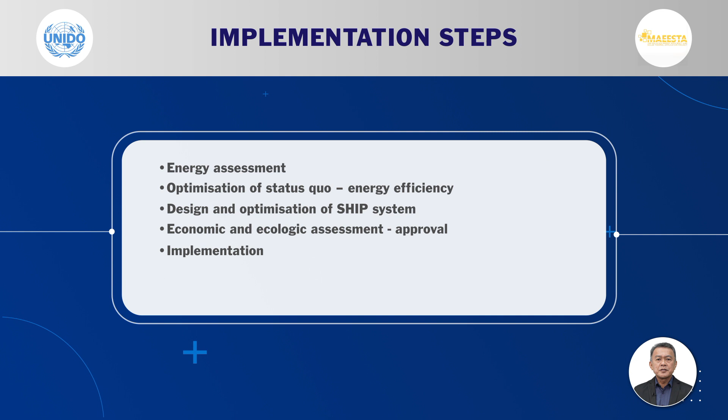The implementation of a well-designed system starts with an energy assessment. Energy assessment provides you with information on how to optimize the performance of your existing system, as well as identifying potential solar thermal integration points. The focus is to maximize energy efficiency first, prior to considering any solar thermal integration.

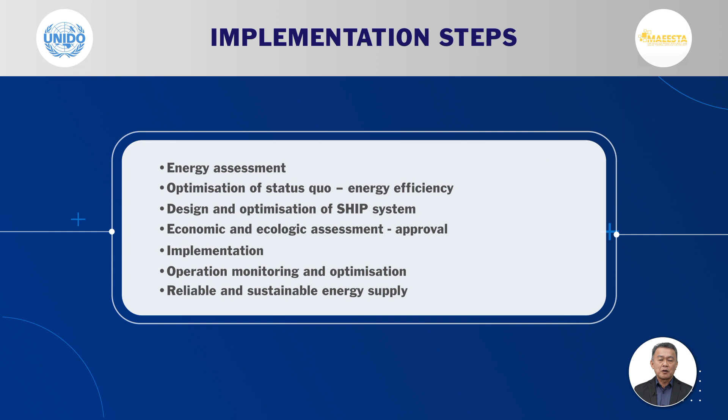Once the integration point is identified, you can then start to design your proposed system. The key information required are the required temperature and mass flow, operating hours per day, operating days per week, as well as typical off days in a year, together with availability of space for the solar collector and the storage tanks. A well-designed system will have good monitoring instrumentation in place.

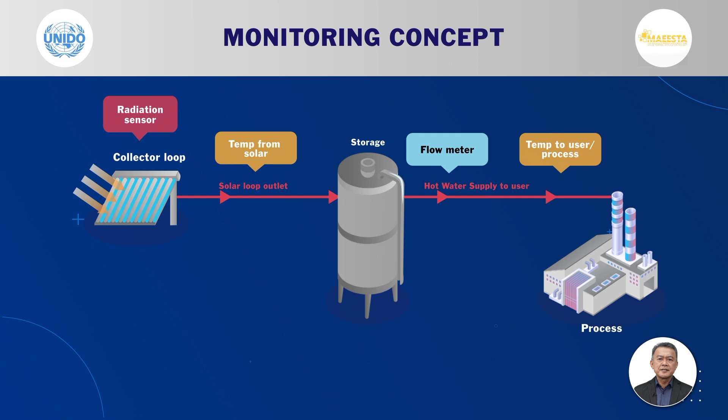Once the installation is completed, testing and commissioning is important to optimize the performance. Information from the monitoring system are key input to good testing and commissioning.

For solar thermal system, the basic monitoring concept would involve measuring the temperature and flow of the solar loop, temperature and flow of the process loop, as well as the temperature in the storage tank and the volume of top-up water. For large size tank, it may require more temperature sensors to have a good profile of the temperature of the hot water. Measurement of ambient conditions such as solar radiation, wind, temperature are useful but not critical.

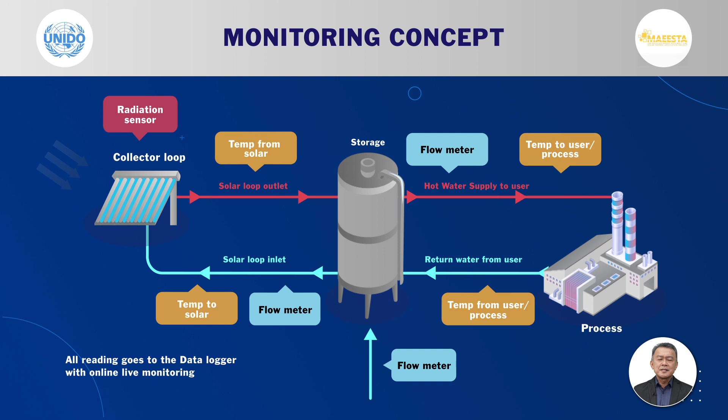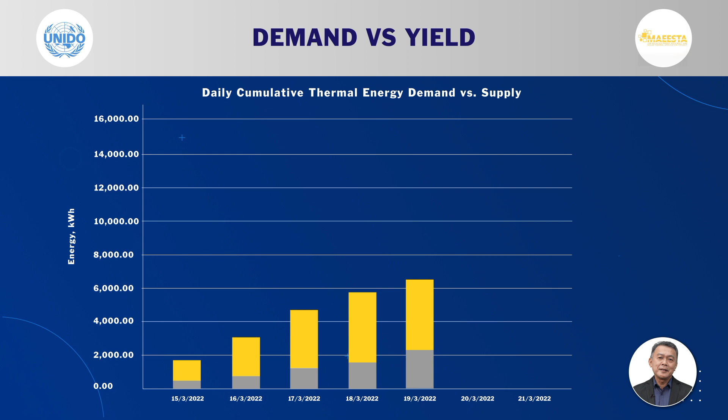The main objective of monitoring system is to have an insight into the system performance. The goal is to have as much heat delivered by the sun while keeping the auxiliary heatings to the minimum. Monitoring data allow you to visualize your system performance, comparing thermal demands against heat yield from the sun.

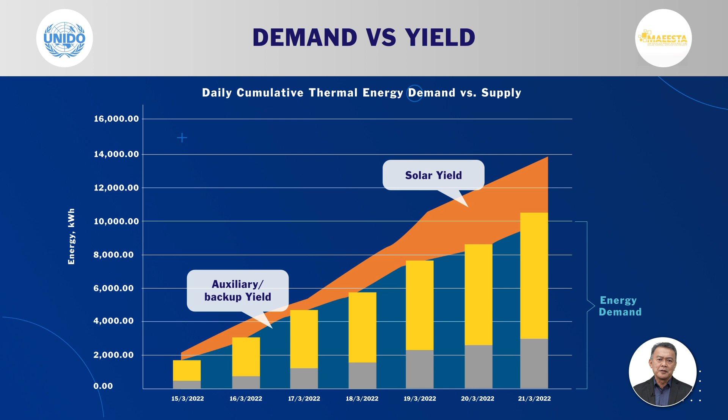The target is to have as much solar yield as possible. The solar yield provides you with information about your cost saving and the GHG reduction achieved by your system. The maximum amount of heat you can get from the sun is very much a factor of the size of the aperture area of the installed collector and the collector efficiency.

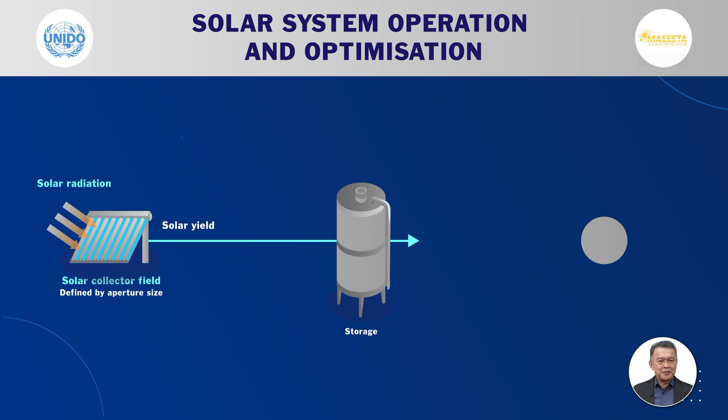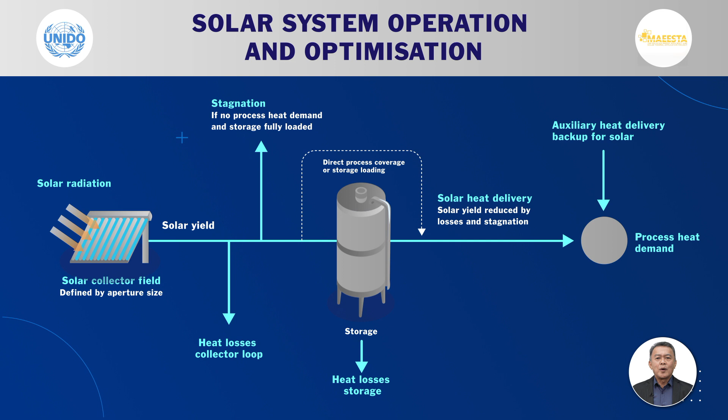Optimal solar operation requires optimal control, especially with regards to the set temperature and flow of all the different loops. Heat losses in the collector loops, distribution pipe, or storage could affect system performance. So good information from monitoring system will allow you for optimization of your solar system.

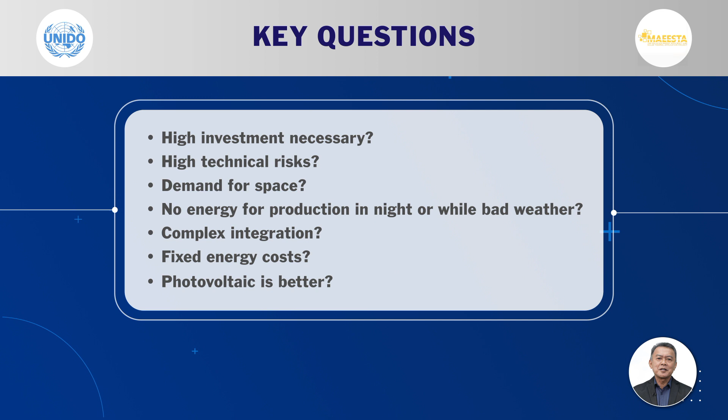What would be the key concern when people are considering solar thermal? Some will say that PV is much better option. It depends really. If you have thermal demand within your facility, solar thermal is an obvious choice, as solar thermal collectors have higher efficiency compared to PV. Typical solar thermal collectors are 3 times more efficient than PV panels. Hence, you will require smaller space for solar collectors.

What happens in the event of no sun? This can be addressed with good design and storage, as well as backup heating system. Some will think that solar thermal has technical risks and complex integration. This can be addressed by good design, as solar thermal technology is a mature technology.

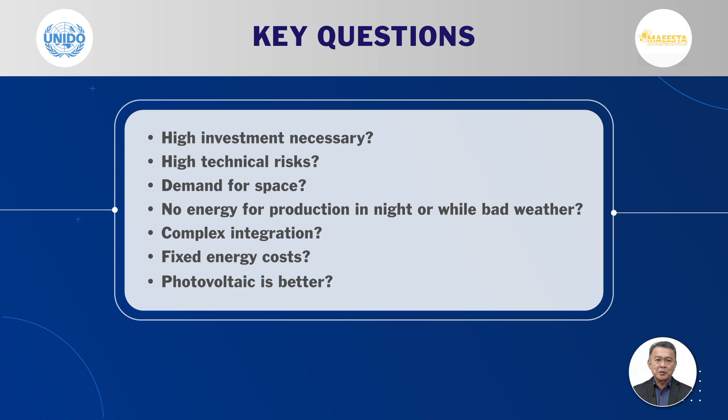With the price of energy forever increasing and the push for net zero, solar thermal is the perfect solution to isolate yourself from increasing costs and decarbonize your operation. Investment in solar thermal provide you with heat at fixed costs over the lifetime of the system. Even at current investment costs, for most conditions, the levelized cost of energy from solar thermal is much lower compared to fossil-based heat.

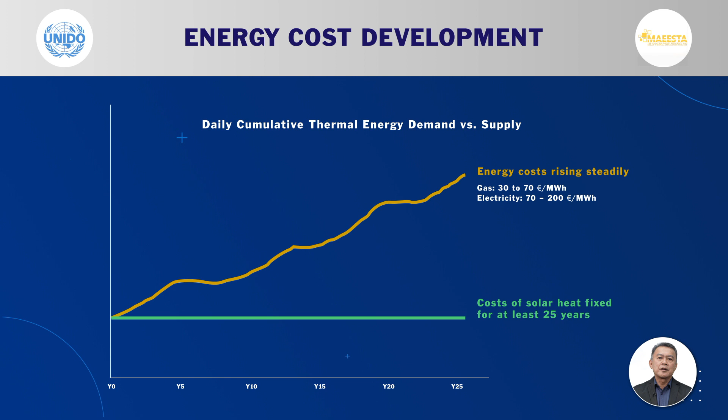To summarize, solar thermal is a reliable technology that can provide endless free energy. A well-designed system with good monitoring in place will ensure you get free energy as long as the sun keeps shining. When you have thermal demand in your facility, think solar thermal first. Solar thermal can help decarbonize our industry.